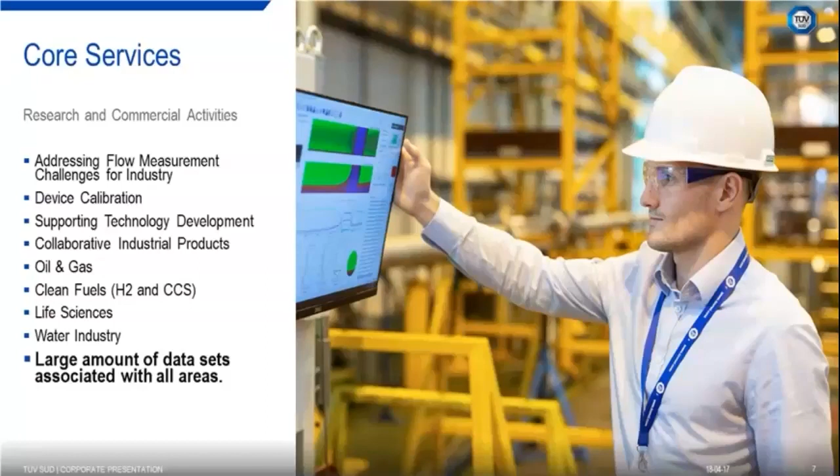Here's a picture of our national laboratory. We actually have our own facilities here in East Kilbride, Scotland. Our own engineers design and maintain these facilities, which allows us to better understand our data from temperature sensors, pressure sensors, and other types of sensors, and also the mechanical equipment that we hold here.

As you know, both sensors and mechanical equipment are standard components in all industries, which again means that the data that comes off the equipment, and the analysis and data analytic techniques that we use here, are applicable to all industry.

Our digital services team, including myself, come from different backgrounds with diverse skill sets, which we believe is a bonus for everyone who wants to collaborate and work with us. We're not just modeling the data blindly, we actually relate it to underlying physical processes. Our engineers here from different groups also help us better unveil and find more useful aspects of our data. So we know what can affect the data - things like electrical noise or missing values - we understand that at that level before applying any data-driven technique.

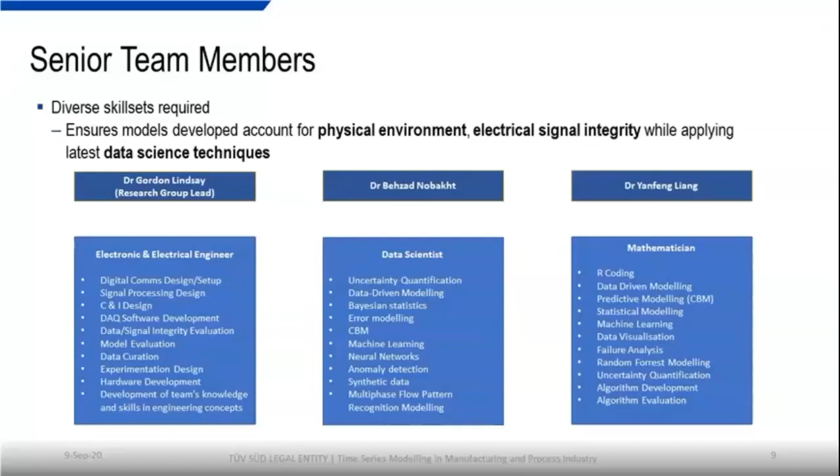Our group's main research project is a 3-year research project funded by the UK government, Department of Business, Energy and Industrial Strategy, known as BEIS. We aim to automatically determine flow meters' conditions, or their operational state, based on real-time diagnostics and based on operational variables and diagnostic variables. We eventually provide our end users with intelligent feedback diagnosis.

Here I just pointed out different conditions that we test in our laboratories, which enables our models to be fed by diverse scenarios and therefore be more generalizable. You can see the likes of misalignment tests, cavitation, fluid density, and pressure and temperature effects in our facilities.

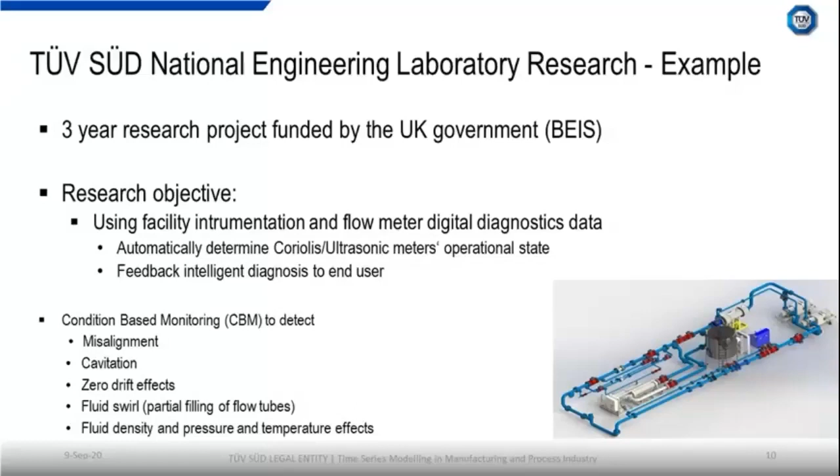We start off with a brief overview of what time series basics and applications are. We then talk about correlation analysis in time series modeling, data preparation and reshaping, and how it is linked with the type of model. We then move on to see some state-of-art models in time series forecasting and also sequence-to-sequence prediction.

In the end, we have a case study where we use an autoencoder, or encoder-decoder network, to detect anomalies for different flow meters or for different calibration conditions. Again, the purpose of this webinar is to give you some insight on major considerations and key elements in time series modeling, and more specifically multivariate time series modeling, and not necessarily the best model that can be used for multivariate time series data.

On the right-hand side of this slide, you can see the diagram, which is the general process we take when approaching data-driven projects. The key thing is knowing what the objectives are beforehand, and what can be potential future objectives as we go forward. Some steps in the diagram have a lot to share, and it's not a very rigid workflow. For instance, EDA (exploratory data analysis) and feature engineering can be addressed at the same time or stage of our data-driven pipeline, so many of these stages can overlap quite a lot.

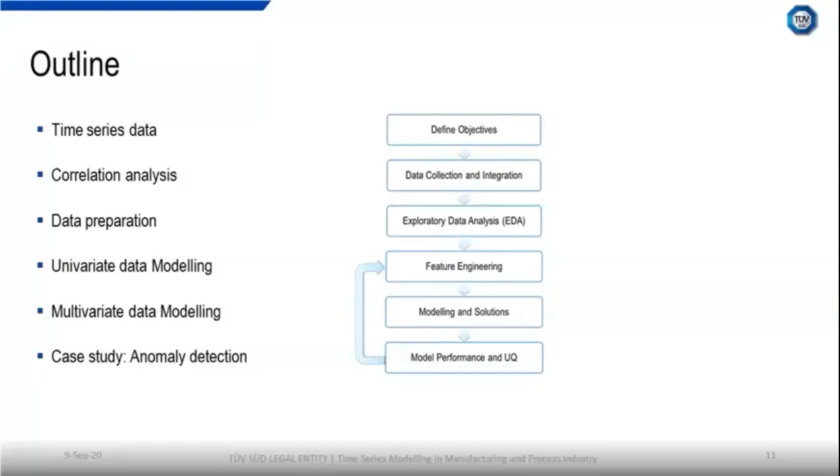Time series prediction is an important area in machine learning. There are many prediction problems that involve a time component, because real-time processes are indexed by time, and most industrial sectors record and collect their data based on time indexes. So what is a time series? A time series is a sequence of observations taken sequentially in time, where the time interval can be either equally or unequally spaced—mostly they are equally spaced.

Time series analysis accounts for the fact that data points taken over time may have an internal structure, or correlation structure. These correlation structures should be known and accounted for in our modeling approaches. For instance, we have different applications of time series data in sectors like finance, including stock

changes, currency exchange rate, GDP of a country every month or every year. In healthcare, we have electrocardiogram signals (ECG) or PPG signals, which track a patient's health condition. Or recently, as you all know, we have the number of COVID-19 cases per day for different countries or cities, which is again another type of time series data.

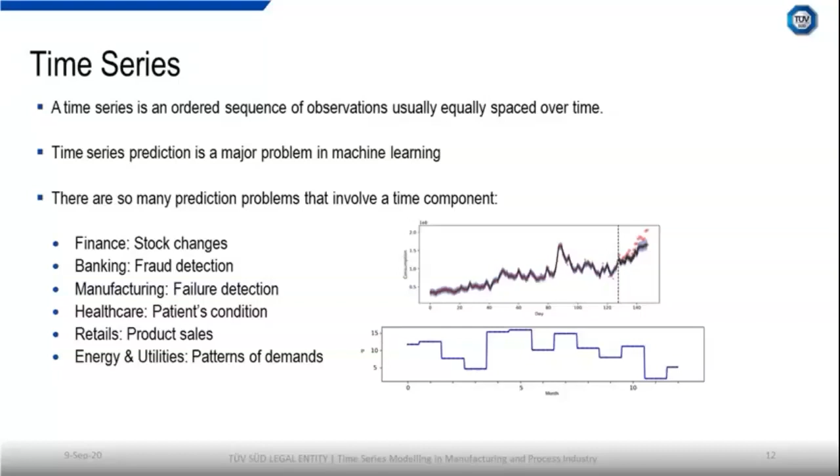Let's see what properties can represent a time series. The first one we'd like to talk about is trend. A trend pertains to the long-term progression of a signal. Here we have an upward trend in our univariate time series data.

In the next figure, we have two variables, one going upward and the other going downward, and these two variables are inversely correlated. Because there is more than one variable, we call this kind of time series data multivariate time series data—one goes downward, one goes upward, and we'd like to see what happens

in the future. The other important component of time series data is called seasonality, which pertains to periodic behavior that is repeated throughout time. For instance, here we have a repeated pattern every 10 days, which is a clear sign of seasonality. In some other time series data, we have both trend and seasonality, as can be seen in this figure—an upward trend as well as seasonality.

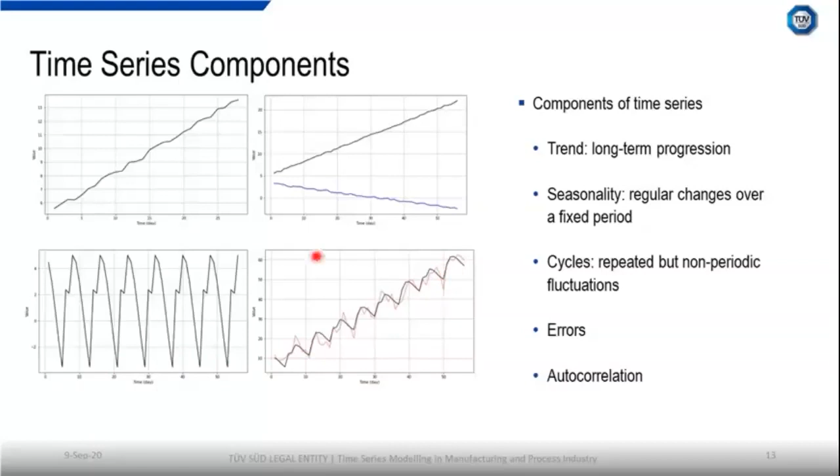We all know that every measurement is prone to either systematic or random noise. I don't intend to go through the details of sources of errors here, but just want to point out how a noise model selection can influence our predictions. In many regression modeling problems, the noise is not parameterized inside the loss function. Therefore, our loss functions, such as mean squared error, assume the standard deviation—they don't parameterize it as an unknown. So in this case, we assume the noise is known to us. But in fact, the noise can be modeled itself, treated as an extra unknown in our modeling approaches, because the noise can behave differently in various periods of time.

So in this graph, we can see observation data, shown as these black dots. It begins very stable.

There is not much fluctuation here. And once we go forward in time, we can see very high heteroscedasticity behavior in data. In this case, the standard deviation of data is clearly rising as we go in time domain. So if we use an improper noise model like a Gaussian white noise model, which has a constant standard deviation, we can see what happens.

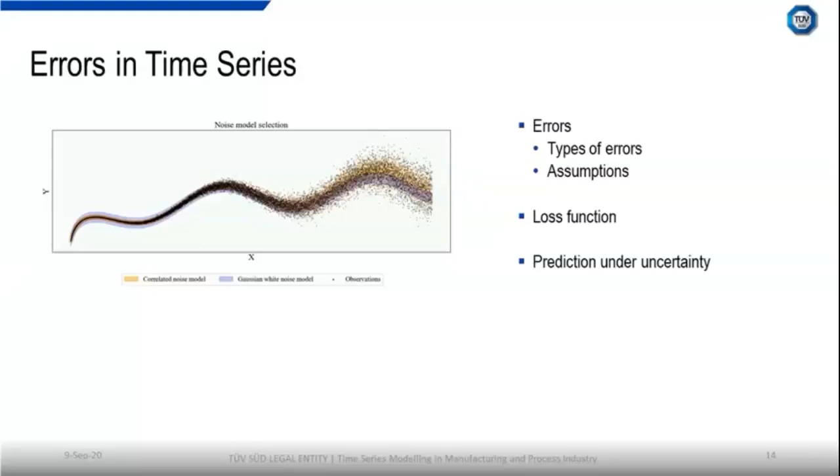So in time series forecasting, we mostly come across the term stationarity, which means that the statistical properties or characteristics such as mean or standard deviation of a process generating a time series do not change over time. There is also a great tool to check the stationarity and see if the standard deviation or mean or any other statistical properties change over time. This useful tool is called the autocorrelation function.

The autocorrelation function finds correlation within the time series and not between time series. What do we mean by correlation within time series or within time domain? The autocorrelation measures correlation between a time series and a lagged version of itself. So it just accounts for the temporal dependency or temporal correlation within a time series.

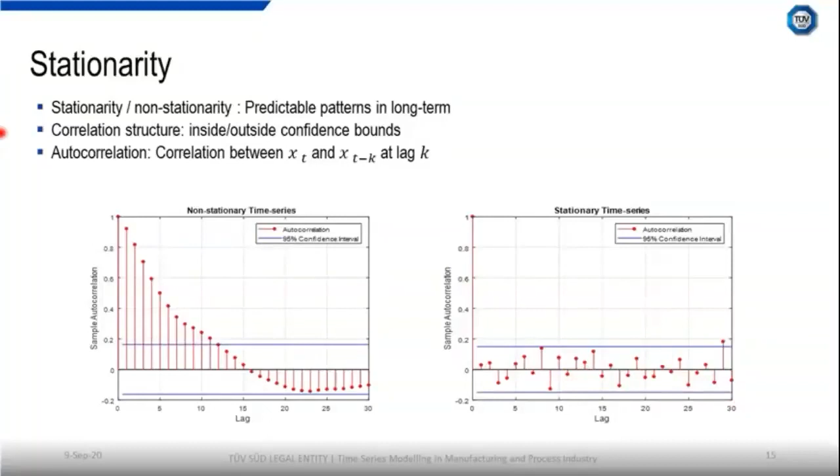So as we said earlier, temporal correlation or temporal dependency is the correlation within the time series data at different time steps. The autocorrelation function pertains to linear correlation. If we are looking for nonlinear dependency, there are other metrics such as mutual information, which is a statistical approach to determine both linear and nonlinear relationships in data. Mutual information measures how much information is known about one variable from the observation of other variables.

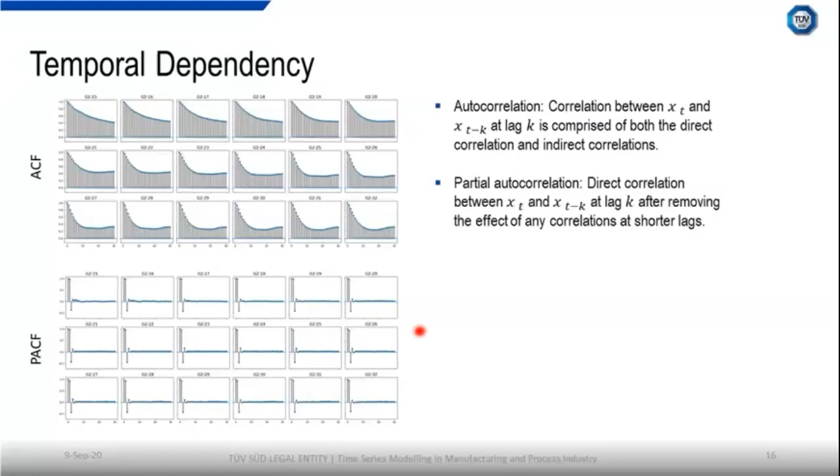So to capture different temporal structures, we can make use of both moving average and autoregressive models at the same time. In this case, ARIMA models, or autoregressive integrated moving average models, are among the most widely used approaches for time series forecasting.

In an autoregressive model, the forecast corresponds to a linear combination of past values of a variable, whereas in a moving average model, the forecast corresponds to a linear combination of past forecast errors.

Basically, ARIMA models, as can be derived from its name, combine the two approaches of autoregressive and moving average. And the integration part actually is a differencing operation, which tries to transform non-stationary time series data to stationary time series data. The problem with the ARIMA model is that it only works for univariate time series data and finds only linear relationships.

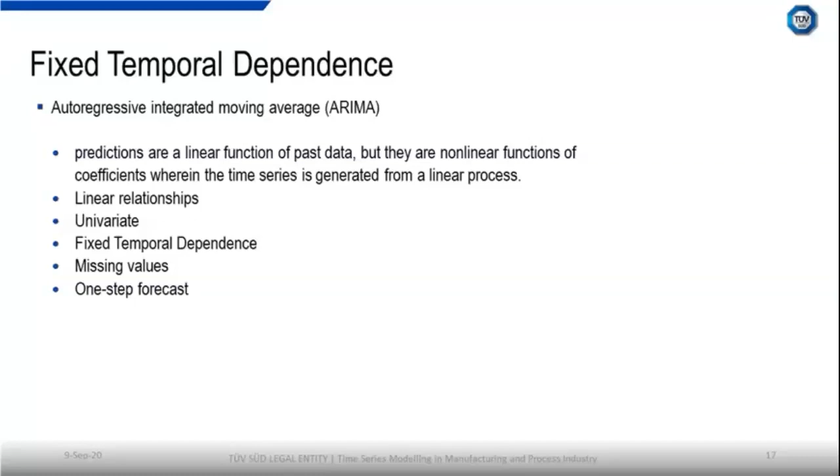So now, what if we would like to find a way to automatically extract useful information from the high-dimensional data that we already talked about? If our initial analysis proves the existence of a temporal correlation, then we can use a kernel or feature detector that slides along the time domain and tries to extract useful information. As it moves along, it extracts useful information from hidden data.

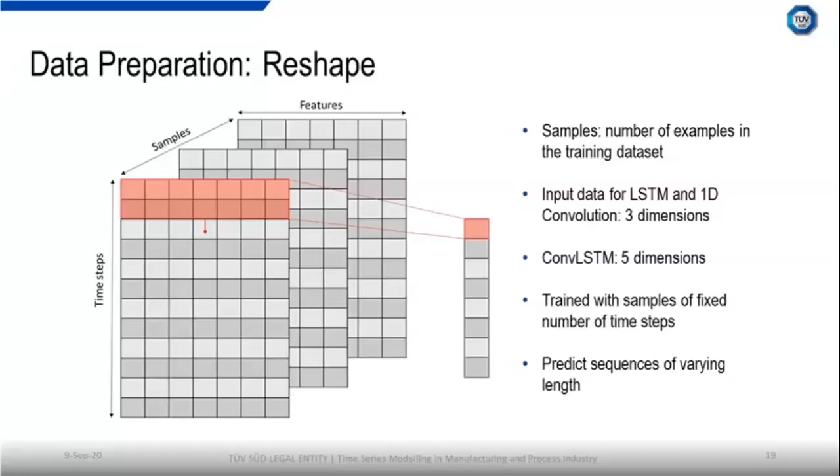Another important data preparation concern is how to arrange input and output sequences for our neural network model. The question is how to achieve a more consistent and robust measure of model performance. Other questions are what should be the forecast horizon, and how many time steps are needed to predict the output sequence. All these questions should be addressed by a sliding window, also called rolling window, or an expanding window. Some people also refer to this as backtesting.

A sliding or rolling window is usually applied to high frequency data. When we have too many data points, we can use a rolling window and move along the time domain. On the other hand, the expanding window is used more often where the number of historical points is limited. They can be used for both single-step and multi-step forecasting, and also for both supervised and unsupervised problems.

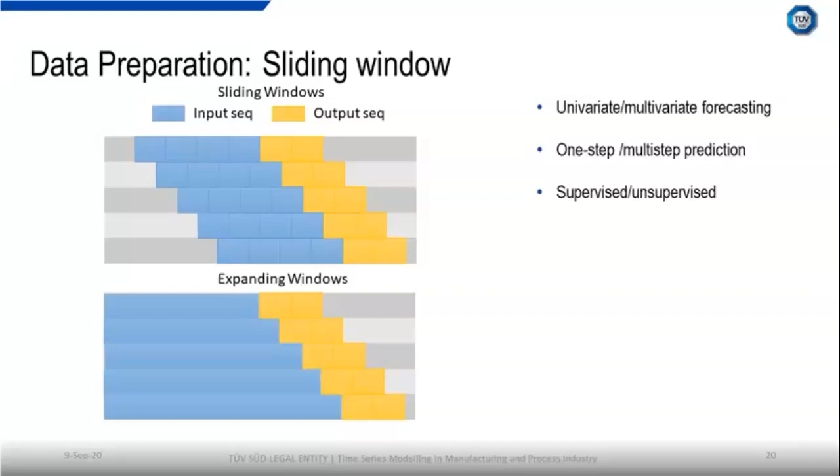So now a crucial factor here is validating our model, or testing the generalization capability of our model, which can also be related to the choice of training and unseen test sets. So any wrong specification of training and test set can have an enormous impact on our final model. In time series prediction, we have two major validation approaches: in-sample and out-of-sample prediction.

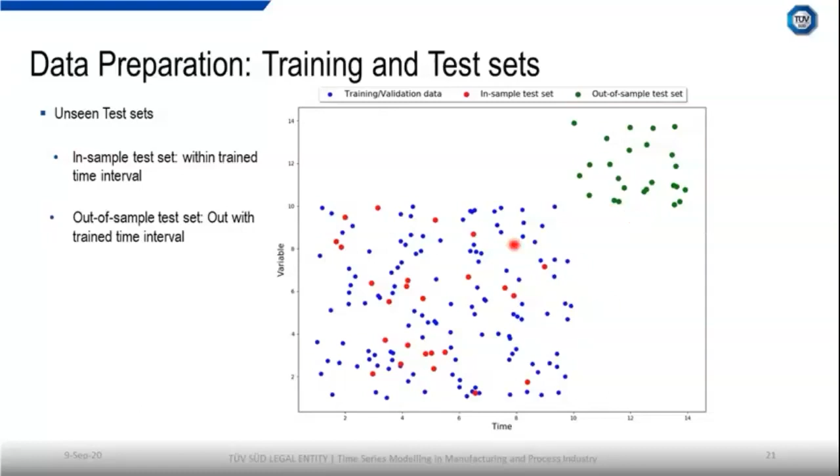So once we tested our model on unseen test sets, in-sample or out-of-sample prediction, we need to know actually how far out our model can predict reliably. In other words, our predictive domain should be proportionate with the model's capability.

and our prediction becomes much more reliable. So it's very important to know the limitations and the robustness of our model in prediction beforehand and even after applying data-driven modeling.

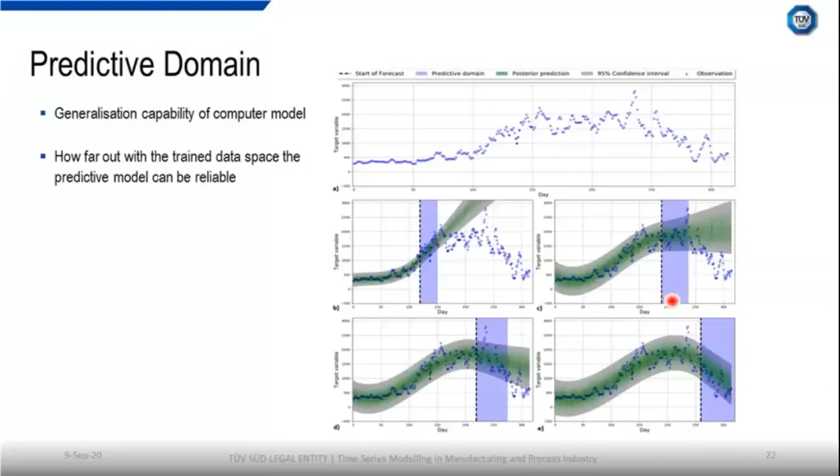So let's have a look at some popular models in multivariate multi-step time series prediction. First of all, we have recurrent neural network models which exploit the sequential nature of the data through the context of its previous state. This enables the network to identify trend and seasonality in data. If we unroll the recurrent neural network cell, we can see that the input enters the network and then moves forward at each time step.

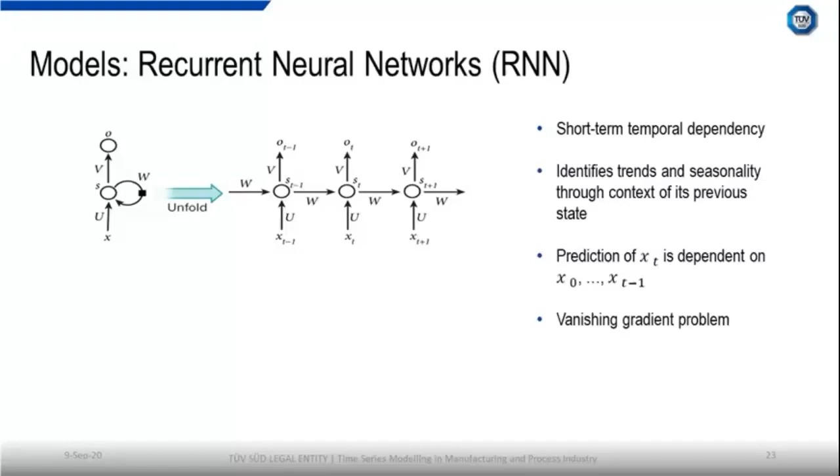There are actually two major problems in recurrent neural networks. The first one is the vanishing gradient problem, which is quite common in recurrent neural networks, and the other problem is that they only account for short-term dependency and not long-term dependency. So let's see what we can do to circumvent this problem.

Not long ago, long short-term memory, or LSTM, neural networks were introduced to handle the shortcomings of recurrent neural networks. As can be derived from the name, the LSTM can capture long-term dependency as well as short-term dependency, because LSTM adds a memory cell into the hidden layer, and the cell state derivative can then prevent the LSTM gradients from vanishing. So we resolve the problem of vanishing gradient, which was quite common in RNNs.

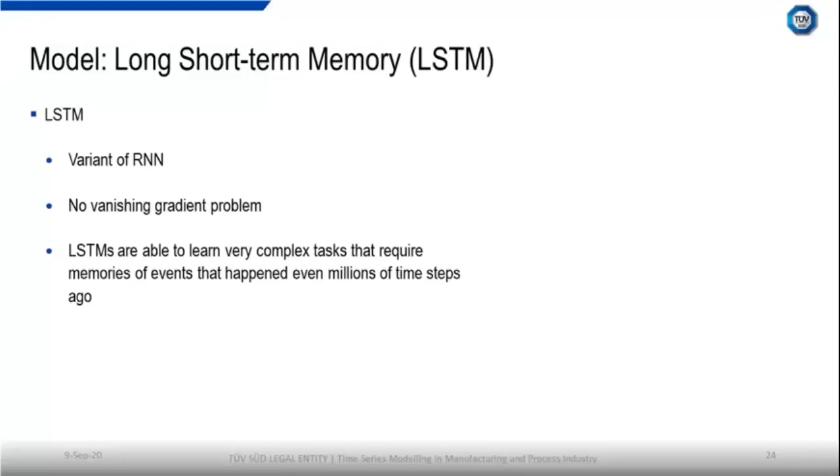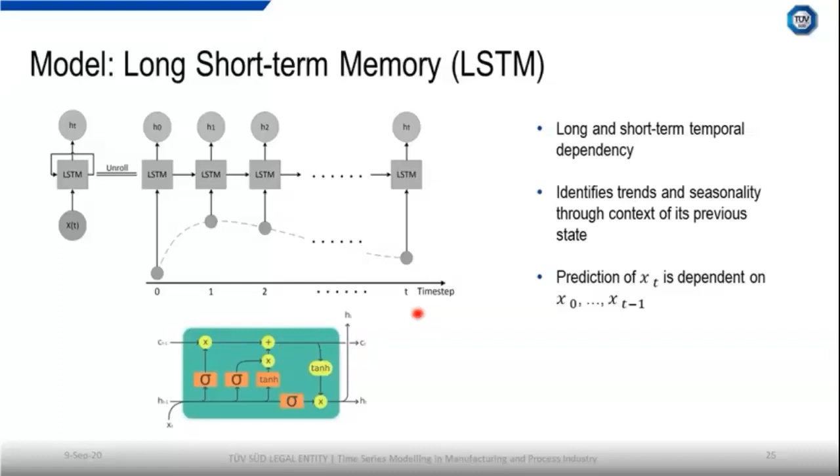So in some problems where we need to reduce the dimensionality of input data, or in some cases where we like to denoise our signals, we can make use of a type of model called autoencoders. Autoencoders look for the pair of encoder and decoder that holds relevant information. They minimize the reconstruction error when the decoding is performed in the network.

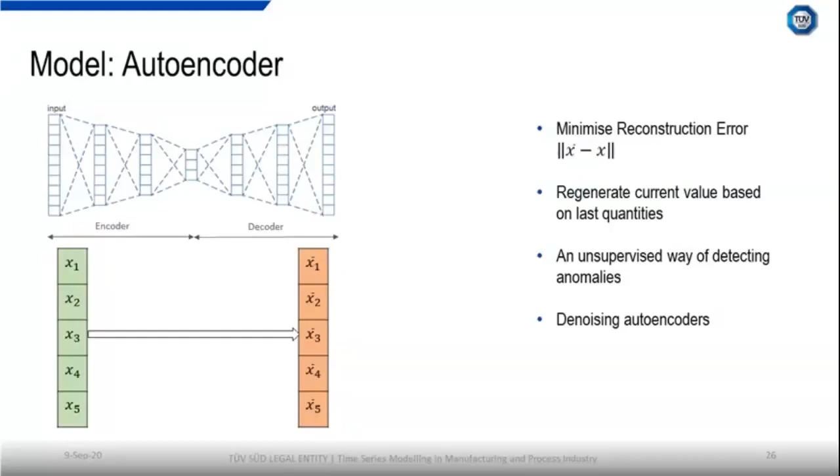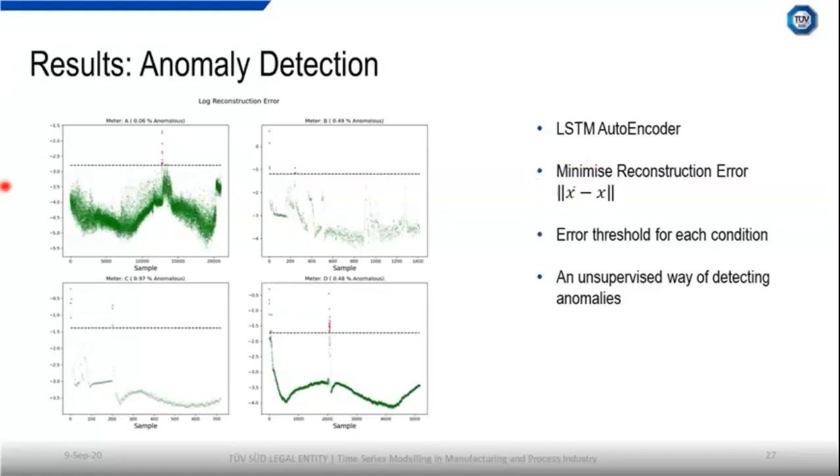So what's the use of it? When we impose noise on an idealized data set, the statistical properties of that noise model are completely known to us. So we know how the model should respond when we have a very limited noise on the data set. When we make our data set idealized, we remove all structural uncertainty from the data, so we expect the model to 100% recover the truth.

But as we add more noise to the data, we expect the model to struggle to find the best prediction for our input data if we increase the extent of noise. The advantage of using synthetic data is that it's very cheap and easy to produce, and we can validate our prediction results before deploying the model.

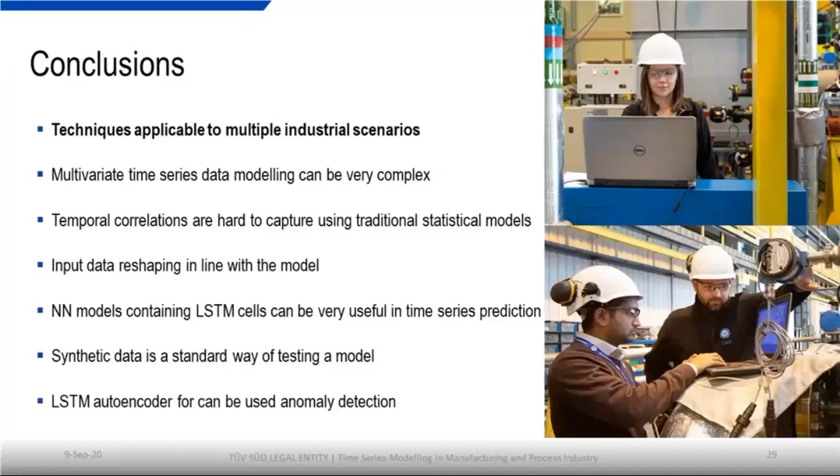Okay, thanks very much for that, Behzad. If you just give us a couple of moments, I think we've maybe got time for a couple of questions. I don't know, Behzad, is there anyone there that you want to answer just now? Yeah, let's see.